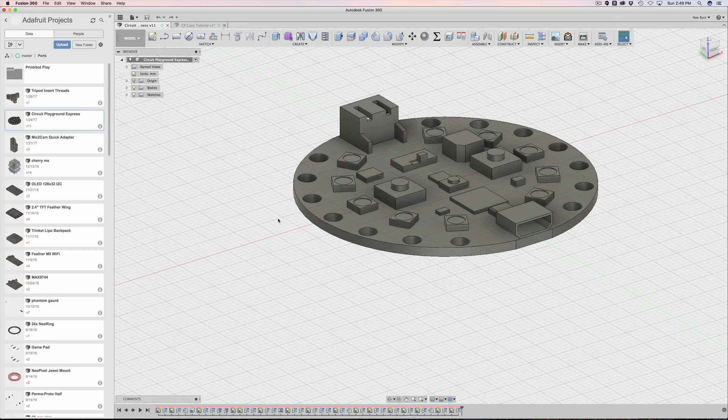In last week's tutorial I showed you guys how I put together the new Circuit Playground Express board using EagleCAD and Fusion 360. So in today's tutorial I'm going to wrap this up and make an enclosure using the component that we drew of the Circuit Playground Express.

So here it is, here's the board. This is free to download and use in your project, so you can do that. You can download it in many different types of formats. I'll have the link down below.

So the first thing we do is create a new document under File, New, and I already have one saved out. Be sure you save the project first. Then what you can do is import the board into your project by right-clicking on it and going Insert into Current Design. This will bring it in the center of the grid, which is perfect. That's where we want it, so we don't have to move it. I'll just hit OK.

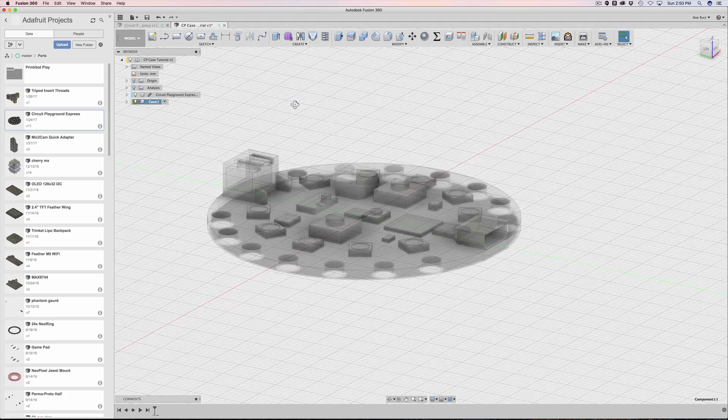And the next thing I'll do is actually make a case component. So I'll right-click on the main assembly here, create new component, and let's go ahead and name it as case, because that's what it will be. And you get a grayed out version of it because now it's activated.

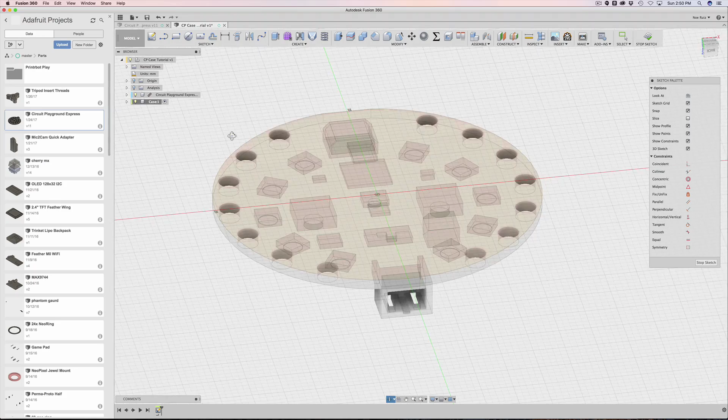So the first thing I'm going to do is actually select the bottom of the component, which is kind of the face of the component. And then what I'll do is I will create a new sketch. That way Fusion will know where to set the plane, and it'll do a projection of that bottom face of the Circuit Playground Express board.

So I'll hide it for now, and what I'll do is create a circle in the center of our grid here, and I don't know how big this needs to be yet, so I'm just going to fake a number like 58 and hit enter.

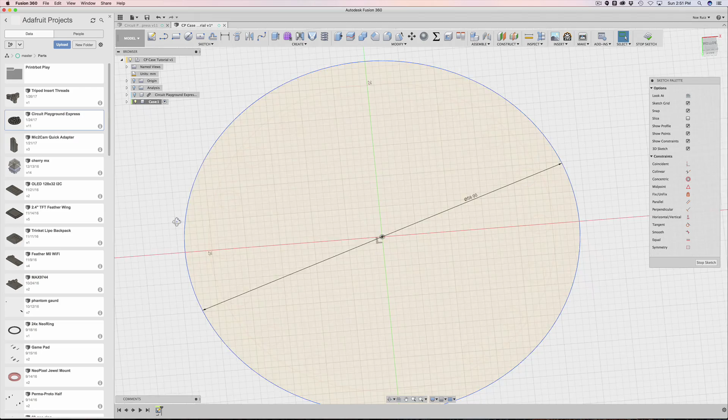The next thing I'm going to do is create a wall for the enclosure, so I'll select the outer circle and hit O for offset, and then I'll bring it inwards. I'll type in -1 because that's how thick I want the walls to be. So hit OK. That's kind of it for now.

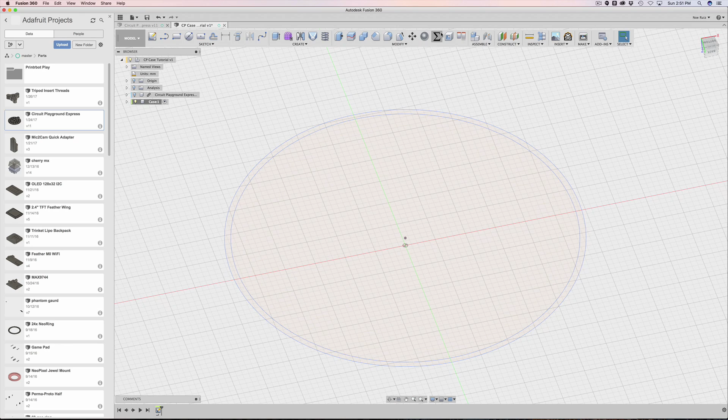The next thing I'm going to do is actually make a user parameter. So I'll bring that window up — well, I already created one, so let me create a new one. I'm going to call this case diameter, and I'll put in whatever value it was, 58, and hit OK.

So now I can extrude this out, and I'll show you why I created a user parameter in a second. I'm going to bring back the Circuit Playground board, and I'm going to grab these three profiles from the sketch that I drew. Actually, you can see there's a bunch of holes and things. So an easier way to do it is, let me hide the Circuit Playground again.

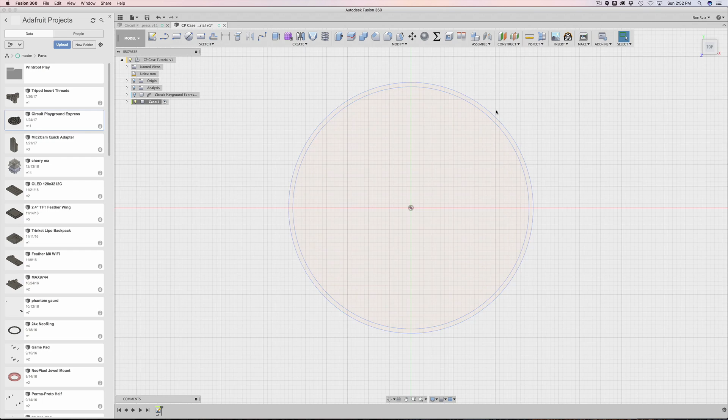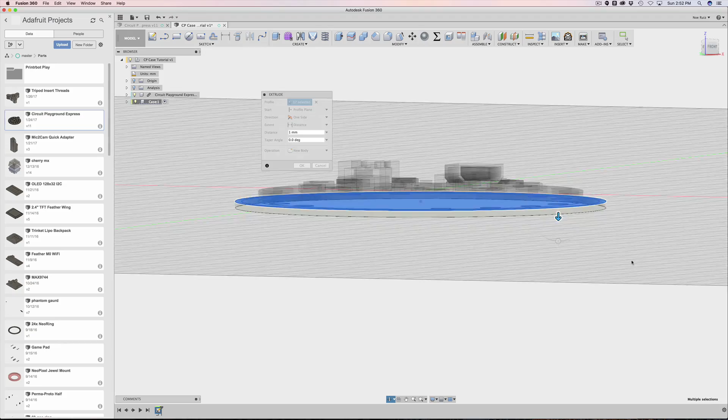What I'll do is make sure your selection over here is set to window selection. Then I'm going to click on the right and drag to create a marquee window, so I can select like a bunch of every profile that's in that sketch. Then I'll hit E on my keyboard, and I'm going to extrude it by 1 millimeter down. It already knows to go down, so that's good, because if we were extruding up, we'd be intersecting into the component. But right now we're creating it down, which is what we want.

So hit OK. Now Fusion's going to go ahead and kind of hide that sketch, but we need to bring it back, so I'm going to bring it back. I'll even name it while I'm here — it's called case, I put some capitals there.

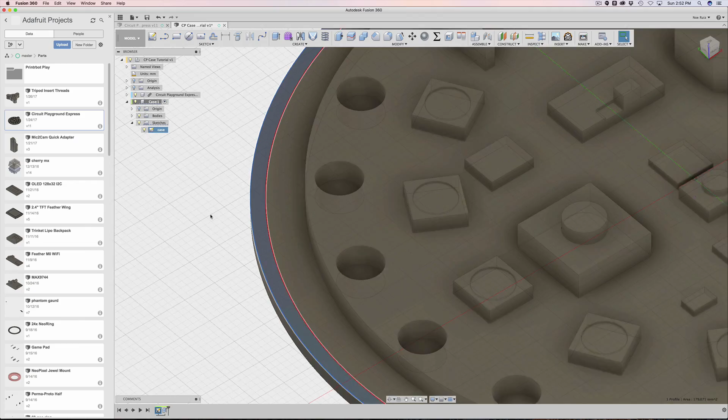Whatever. Next thing I'm going to do is grab that wall profile that we did, select that, and then hit E on my keyboard to extrude it. I'm going to extrude it upwards because we kind of want to enclose the Circuit Playground. Now, how tall you want it kind of depends on what you want to do.

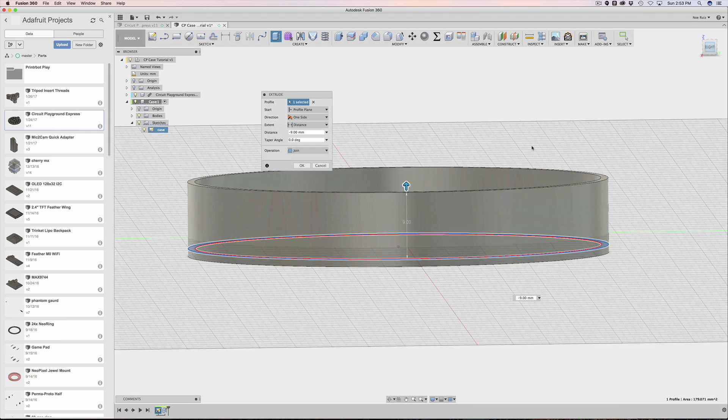I want to break out quite a few — I want to expose quite a bit of the sensors and some of the switches, so I don't want it to be too tall. And if I were to encompass the whole case, it would kind of have to be over 10 millimeters or so, just because the JST connector seems to be sort of the biggest thing of the project.

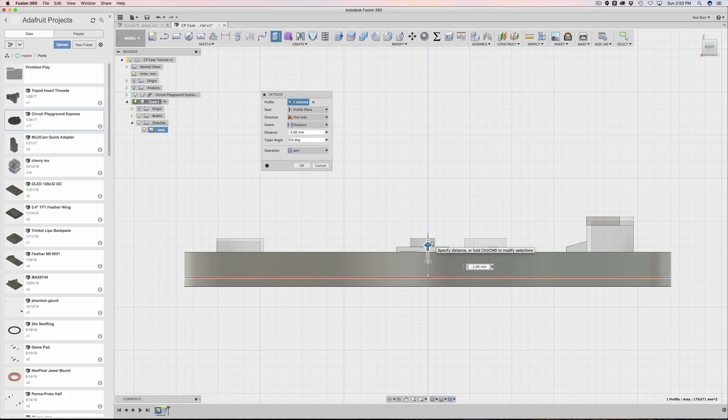So what we're going to do instead is create cutouts so that these components can kind of poke through the top of the enclosure. So I'm going to make this actually kind of small — I'm going to make this 3 millimeters tall, so hit OK.

Now what I'll do is create the lid. To create the lid, I'm going to select this top surface of the enclosure, like the lip area, and I'll go ahead and create a sketch with that selected in Fusion.

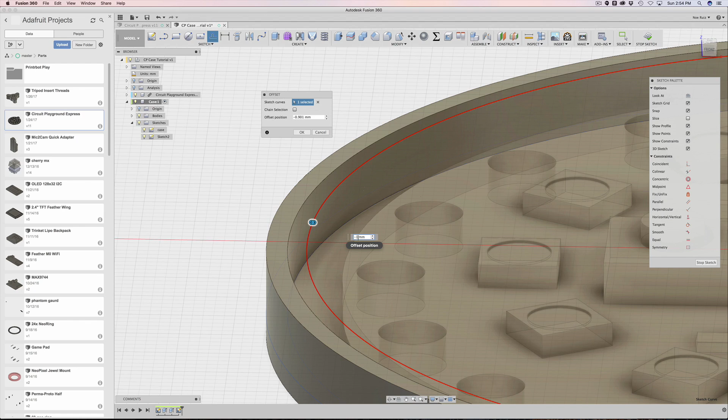Fusion's fine. The next thing I'm going to do is select the inner wall edge, and I'll hit O on my keyboard to offset that, bringing it in to -1 so that I can have a lip that goes on the inside of the case. I'll hit OK, and I'm pretty much done with that sketch. I'll name it as the cover because it's going to be the cover of the case.

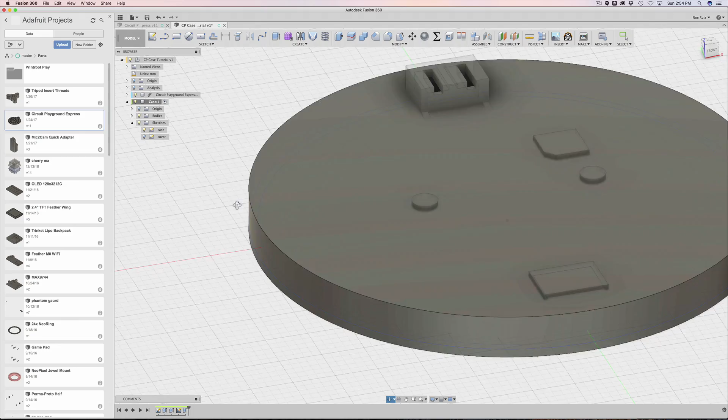Now I can select these 3 profiles from the top cover, hit E on my keyboard, and extrude it by 1 millimeter. I'll hit OK. Looks like I forgot to change the operation. What's awesome about Fusion is you can double click on that extrusion in the timeline and change the operation to new body. Hit OK, and that creates a new body.

Let me bring that open, and let's go ahead and name these now. Call this cover and this one case.

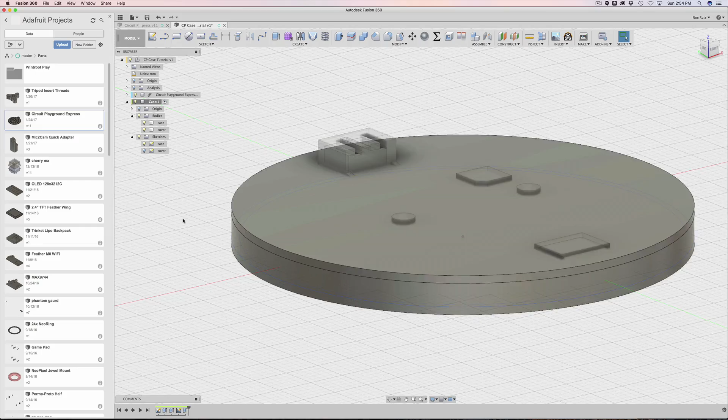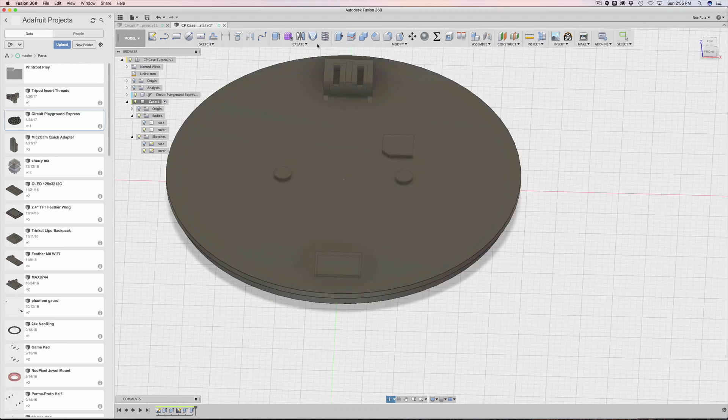Now I'm going to rotate underneath it and hide the case, then hide the case sketch, bring up the cover sketch, and see that little inner wall we created, the little inner circle. We're going to extrude that upwards by 2 millimeters, then hit OK. So now what we have is a lip coming from the cover that will snap into the inside walls of the case.

What we can do now to get a better look inside is create a section analysis under inspect. There's a button called section analysis, or I have it already up here. Click on that, and it'll create a section analysis depending on where you want to set it. I would open the origins and select one of these planes, which is fine. You can rotate it, but I'll have it right there. I'll hit OK.

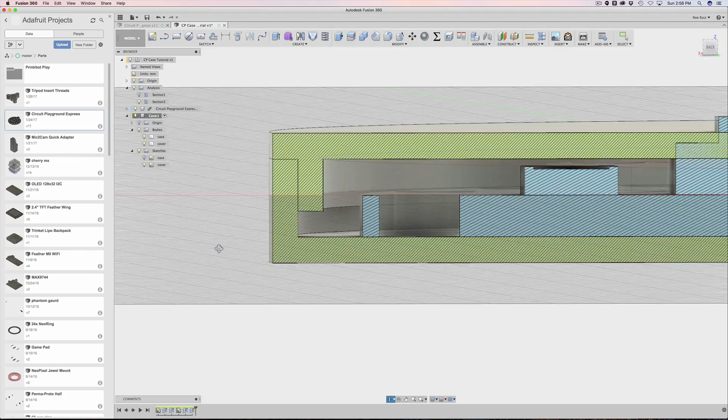When you look inside the section analysis, you can see how it's fitting together. You can see how this wall has a little bit of clearance, so it doesn't touch the bottom, which is fine. We just want to have enough material to be a little bit touching.

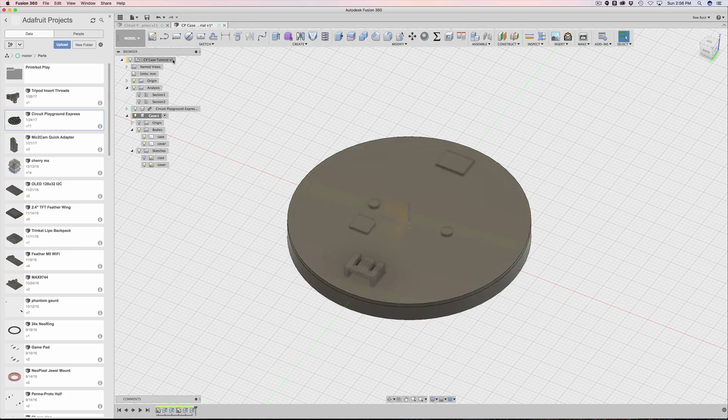The next thing we want to do is start creating some cutouts for the top cover. Let me turn the section analysis off - we're intersecting with a bunch of things. You can see the JST is too tall and some of these buttons are a little big, so this wouldn't work, right? We need to make some cutouts.

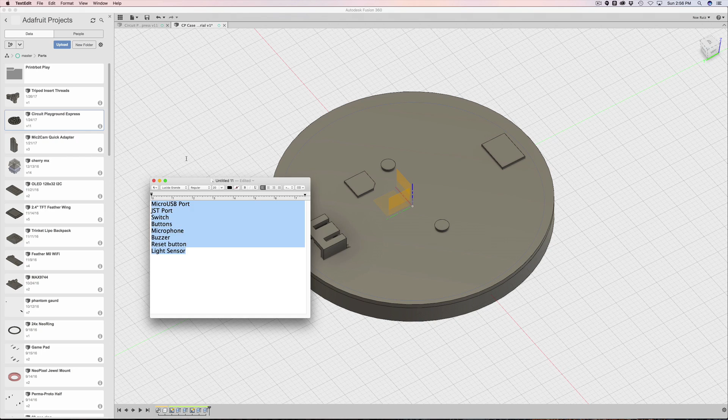I wrote down some notes of what things we want to expose, and I already have them typed out. We want to be able to access the USB port, the JST, the switch which can be used for on or off or other types of things, the 2 buttons on the left and right, the microphone, the buzzer, the reset button, and even the light sensor. I didn't put the NeoPixels because we can print this in a white or translucent case so the lights can shine through.

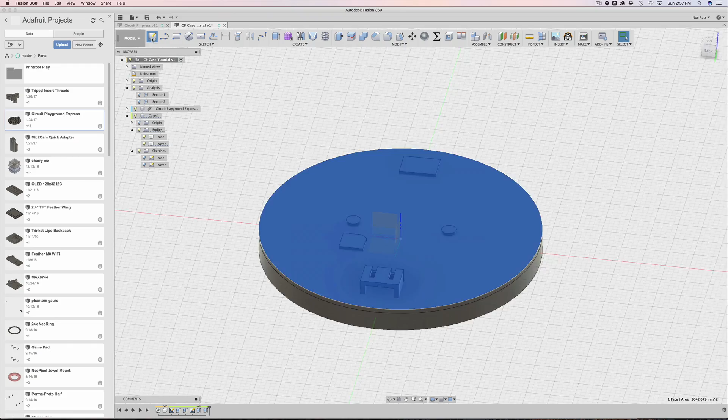I'll go ahead and get started on making those cutouts. What I'll do is select the top of the cover, then hit create sketch. It's really important that we sketch on top of existing geometries and faces so that when we update them later, things will dynamically change. I'll show you that in just a second, and then we'll adjust the diameter dynamically. So I'm going to get rid of the cover, just hide it for now.

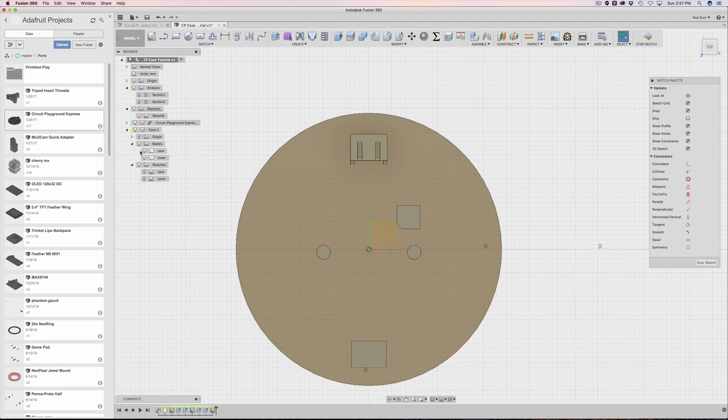Now that I'm in this sketch, I'll project in some geometry. I'll hit P on my keyboard, or you can go up to sketches and hit project, then start clicking on things. I want to expose these 2 buttons, so I'll click on those top surfaces.

I want to expose the reset button. For the switch, you see how this top surface creates an irregular rectangle? I could select the bottom pieces instead and select one line at a time to create that generic rectangle representation of the component. But for this shape here, this is the buzzer, so I can just click on the top face.

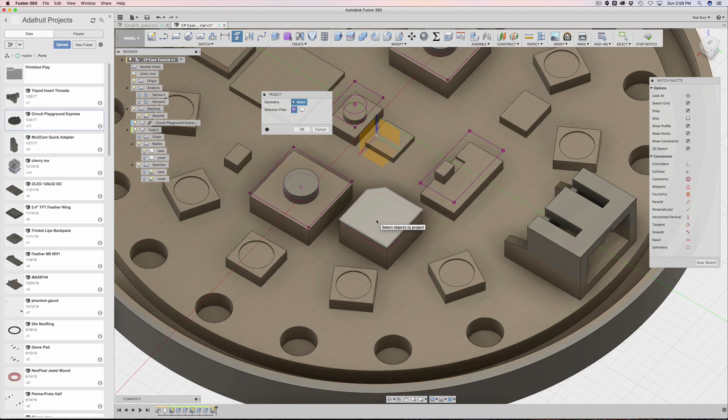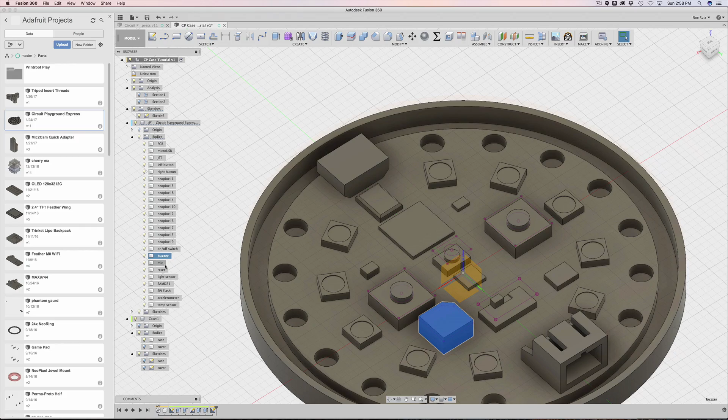I'm not sure where the microphone is yet, so I'll hit stop sketch since those are projected in there still. I'll open the component here, the Circuit Playground Express, and look for what I want. The buzzer, I already got that. The microphone is over here, so let's project that one in.

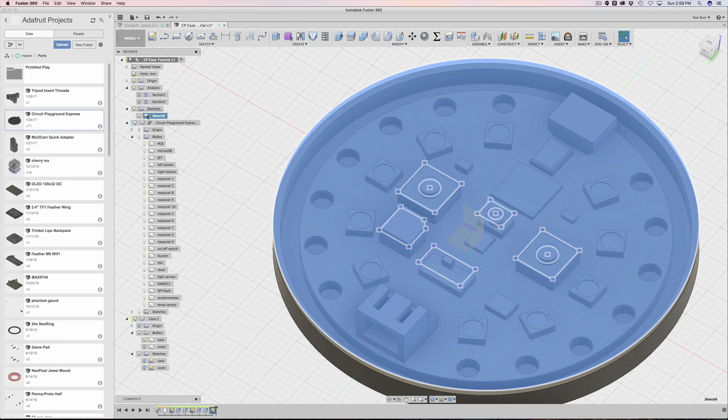I'll go back into that sketch. Where did that sketch go? Looks like the sketch is on the outside, so that's fine. It just looks like we didn't have the component active. That's okay, we're just gonna click on it and open it. We could put it back in the component, but we don't need to right now.

I already forgot where the thing was. Where did it go? Here's the light sensor, so let's project that in. Hit the project button, bring that in, and then hit OK. Let's see, what else was it?

The light sensor's in. We want the temperature sensor, but I don't want to expose that one. And the mic, let's expose the mic. So again, P for project that in, hit OK.

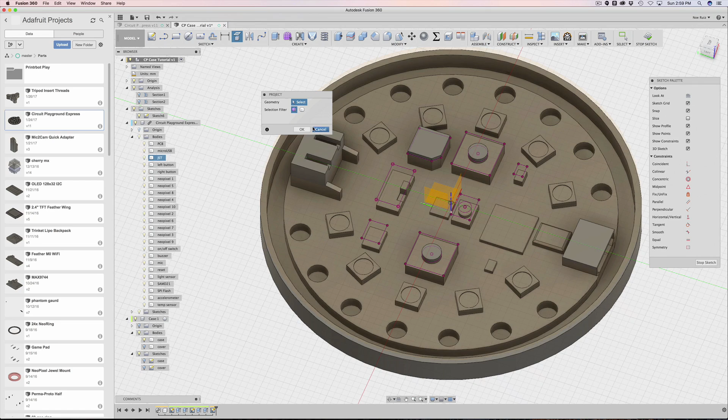The next thing we need to do is project in the USB port. Those are pretty important, so P on that one. There's another way to do it as well: you select the surface first and then hit P on your keyboard, and that'll project it in while you're in the edit sketch mode.

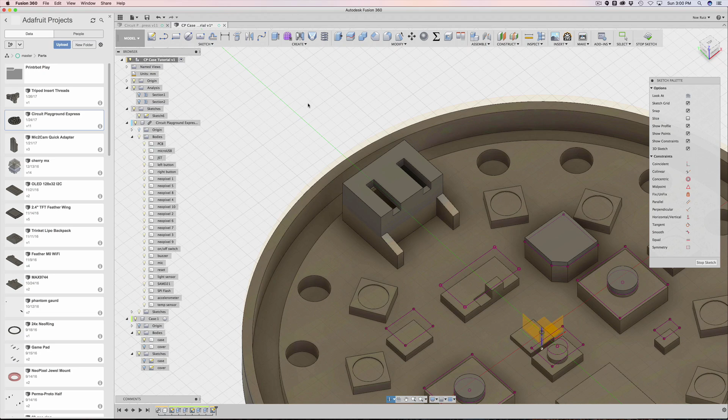For this guy here, I'm going to project in some of the lines because there's a bunch of geometry that I want there. I just want lines, so I'll select these in. Hit OK. So now if I look at it directly on top, you can see how the projected sketches are the purple lines, and they're exact representations of the components. If the components ever change for whatever reason, this sketch will update with them because they are projected and they're being referenced by those components.

The next thing we need to do is create some offsets for these cuts, because if we were to cut these out now as they are, they would need a little bit of tolerance in order to fit through those components. So I'm going to create some generic rectangles to create offsets. Now, you can't really create an offset from a projected sketch.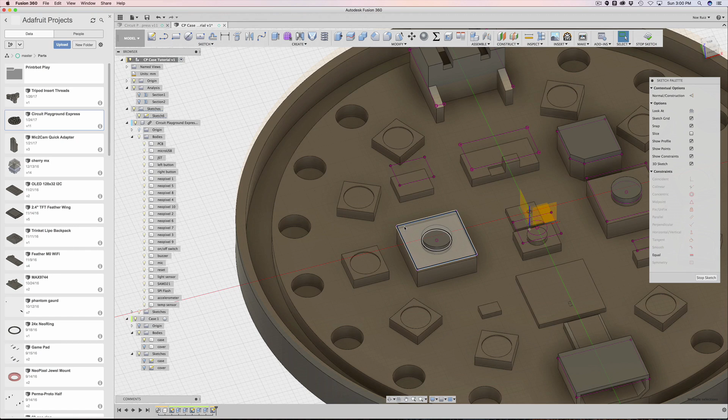So if I wanted to offset that, if I try it... it works! Wow, I thought it didn't work. Well, guess what, we just learned something new. Maybe it works. So I want to project it outwards by 0.4 millimeters and hit OK. Wow, it did work, I didn't think it worked before. That's kind of funny, so that saved me a lot of headache, a lot of work, which is great.

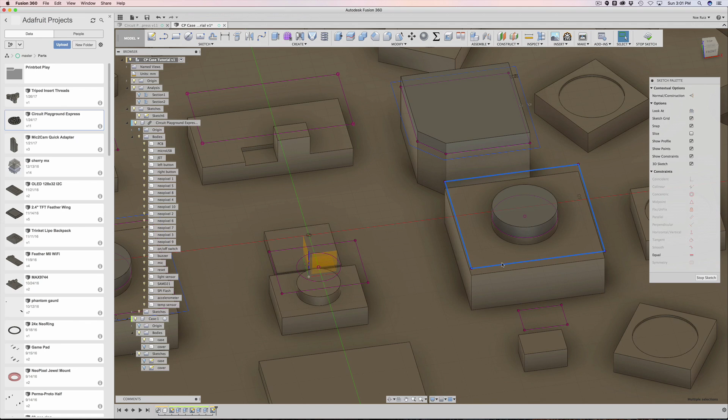What I did though is double click on one of the lines to create... let me try it on this one, double click and you create the whole loop, which is awesome. So I'll offset that one, hit O, put 0.4, maybe copy that into my clipboard because I plan to do that for a lot of things. Double click, O, paste, enter. Double click, did that work?

No. Double click. Oh, I see, it doesn't work for this one, it only works for loops and not like... this isn't a full loop for whatever reason. Because when I projected, I didn't project a surface, I projected edges. So in that case, now I can show you how I was originally doing it.

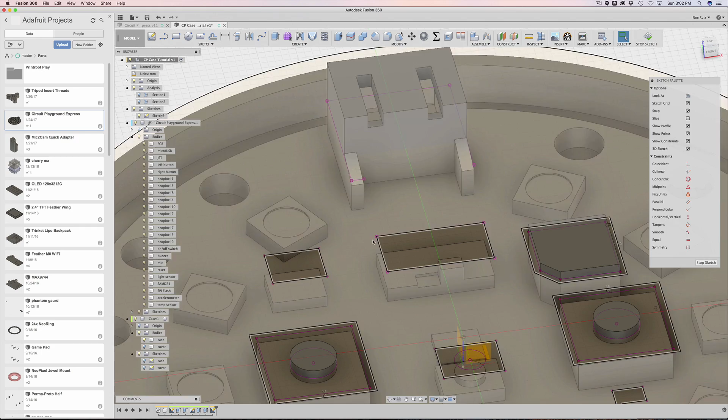It was like using the rectangle tool, which is up here. I used the 2-point rectangle, just kind of create a rectangle over it. And then I used the sketch dimension tool to give it some constraints, saying I want this edge to be a certain distance from that edge, and then I'll put 0.4. Problem with that is I have to do it for every edge, every edge. So there's 4 edges, but as a workflow, you already know what to do.

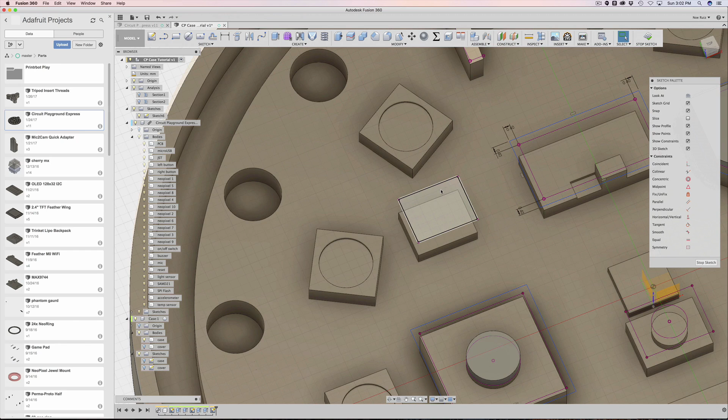So I'll hit escape to get out of that tool, double click, O, paste, enter. Great, so it works for most things, but not all of them. And you don't have to use squares.

For this light sensor, I'm actually going to do a circle, so I hit C on my keyboard for a circle. What I'll do is to get to the center of this... oh, Fusion already knows, awesome, so I just rolled over and it kind of gave me a smart guideline. So I'm going to make this like 3 millimeters, like that, and make a little circle cutout.

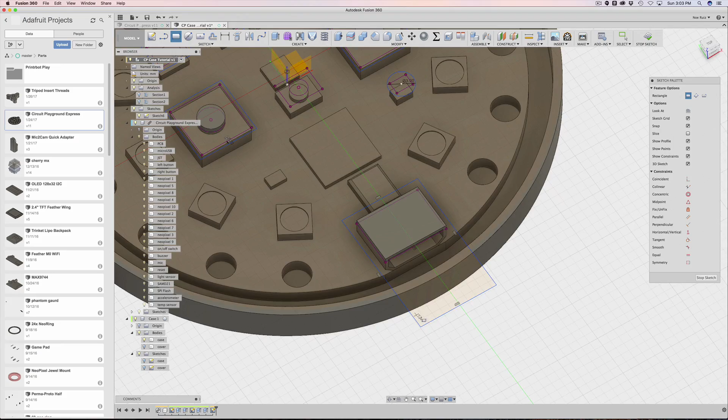So now the last things we're going to do is the USB port and the JST port. For that, I'm going to create a custom kind of shape. It's going to cut outside over here, going to go beyond the edge of the enclosure. And then I'll constrain it to those edges here, like this.

0.4, this one, 0.4. All right, so that's it for USB.

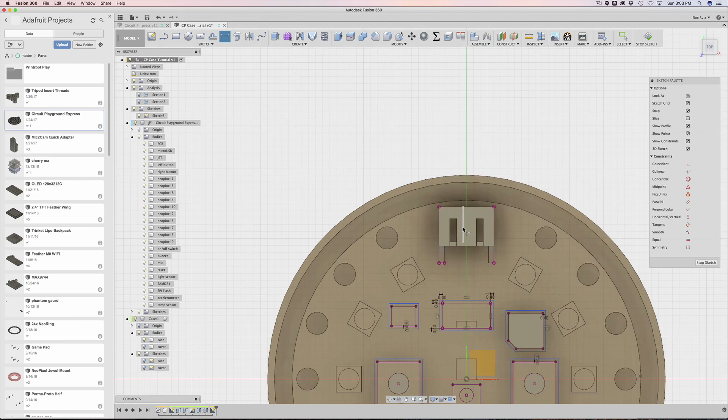Now let's do another rectangle for the JST. Some more constraints. That was pretty close. And then the last one here. There we go. Okay, so that's all the cutouts we want to do.

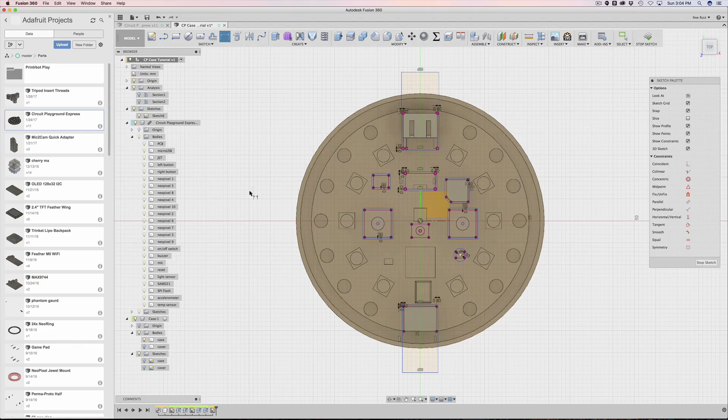The next thing I'm going to do is actually make it easier to select all these profiles, because now you'll see if you wanted to extrude this out, you have to select 2 of these things. So one easy thing to do is to select one of these, one of the edges from the projected sketch and just hit X on your keyboard.

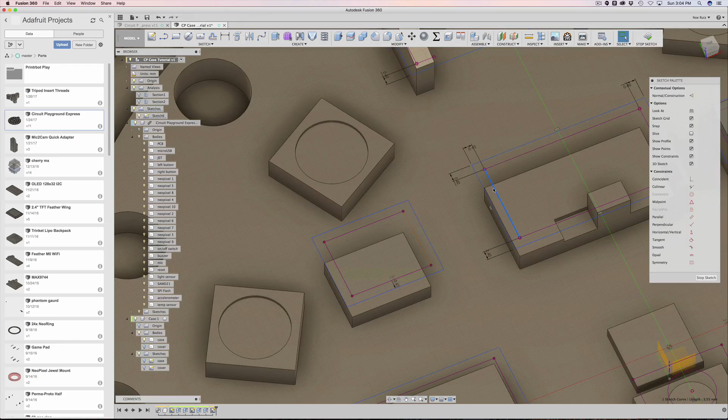And what that'll do is kind of break the loop so that I can select just one profile. All it's doing, you can always change it back by clicking X again, selecting it, pressing X on your keyboard. But in this case, we probably won't be bringing it back, so this just makes it easier to create. Like that one didn't need it, but this one certainly needs it.

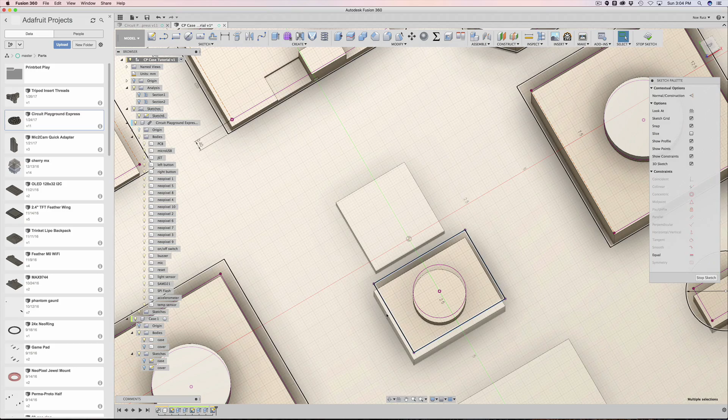So I'll hit X there, X there. It doesn't matter which one you select. So as long as, oh look, we forgot, how could we forget you? We forgot this guy, so I can do an offset here. Double click, O, paste, enter, click on one of these edges, hit X, and I'll even X out the center guy there. So now I just have a straight single profile, and I'll have to do this one too.

Cool. And this one, you get an X, you get an X. There we go. I think that's all of them. Yep. So I'll hit stop sketch.

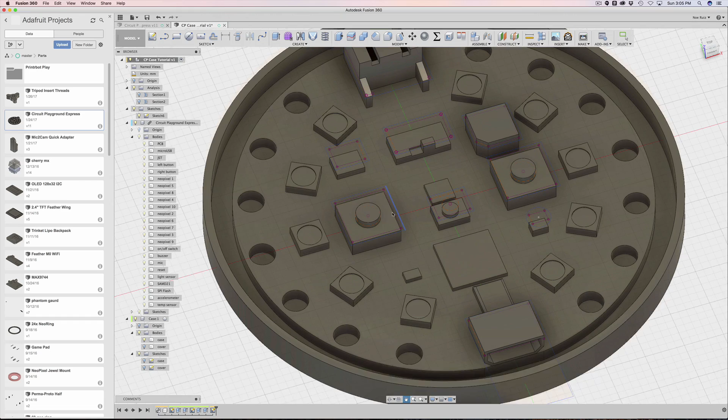Now I will select the things that I want to, looks like I didn't cut one here. Whoops, let's go back in there. And hit X. I really don't want to select multiple, but I'm doing multiples anyway. It's funny. So select this one, this one. Maybe I'm selecting too fast. Nope, just fine. Like that. And then we'll grab these guys.

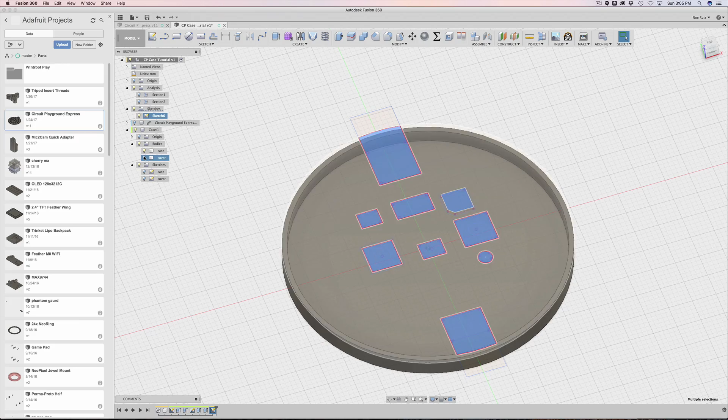And this guy. Cool. So what I'll do is hide the circuit playground and then bring the cover up. And what I'll do is I'll hit E on my keyboard with those selected, and I will cut. Actually, what I'll do is I'm going to make a dynamic cut

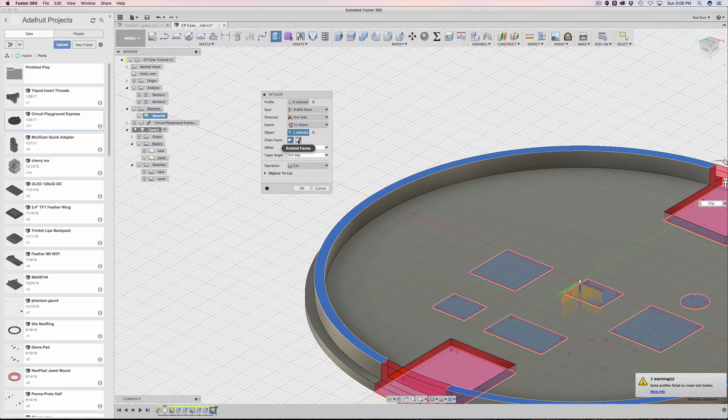on the cover and say I want to extend this to an object from right there. And what I'll have to do is change the chain face. The chain faces need to be on the extended faces so that the extrusion extends out the cut. And we do want the operation to be cut because we're making holes. So I'll hit OK. And now we have some nice cutouts.

Looks all cool and crazy looking. All right, so now when I bring back this circuit playground, oh, you know what? I forgot the extrude one.

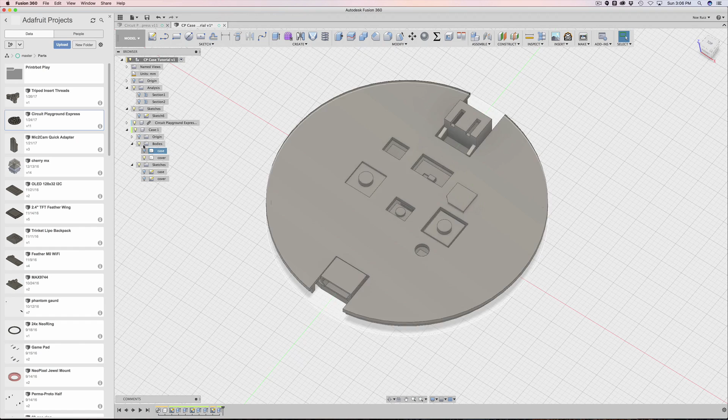That's fine. Inside of, in the bottom here, I can double click on the feature and just add that by holding down Command on my keyboard. So I hit OK, and it's back. All right, we got it.

So let's bring back the circuit playground again, kind of make sure that we got all of our points, and I believe we did. Cool.

So the next thing I'm going to do is bring back the case, and I need to kind of create some cutouts here because it looks, especially for the USB port, you can see that the lip is covering it right now. The wall of the case.

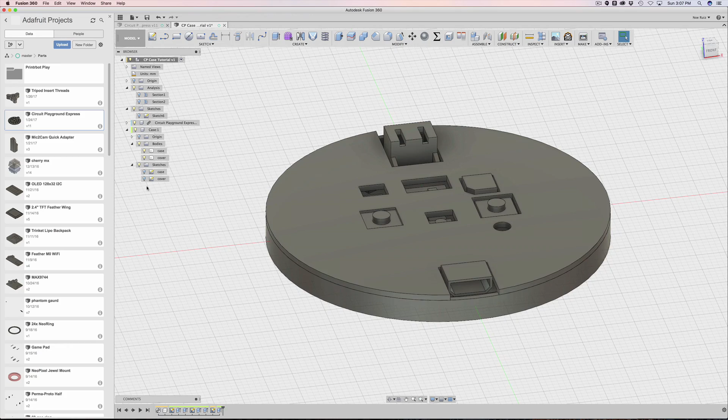So what we need to do is bring back our sketch here that was making cuts, and actually I'm going to do something a little bit special with the USB port. I'll show you what I'm going to do. So I'm going to go back in there, and I'm going to create a line using the line tool up here, sketch, line, or L on your keyboard.

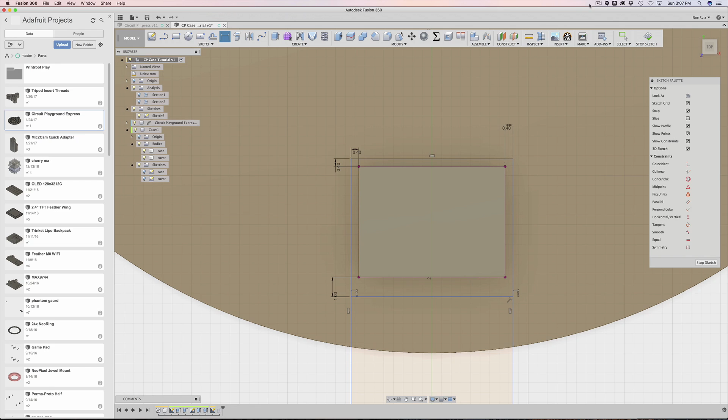And I'm going to cut it like right about here, creating a line, and then I'm going to use the sketch dimension tool to give it a constraint. I want to be 1 millimeter away from it. Hit OK. So now I can do is select that little thing here that I made.

It kind of intersected and created this little rectangle shape. So I hit E on my keyboard, and I'll start extruding this down until I reach, I think 2.5 millimeters is fine. So when I hit enter, you can see now I have room.

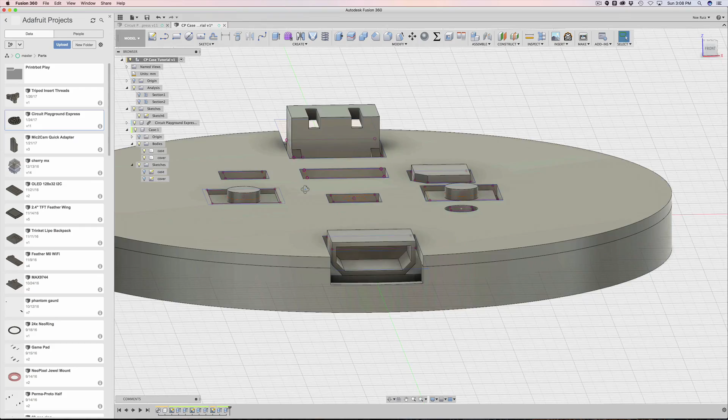Actually, I want to cut all the way down. Let's cut all the way down. So I'll change the extent from distance to object, and then click on the bottom, hit OK. That way, when we put a USB cable in here, it has room to reach it.

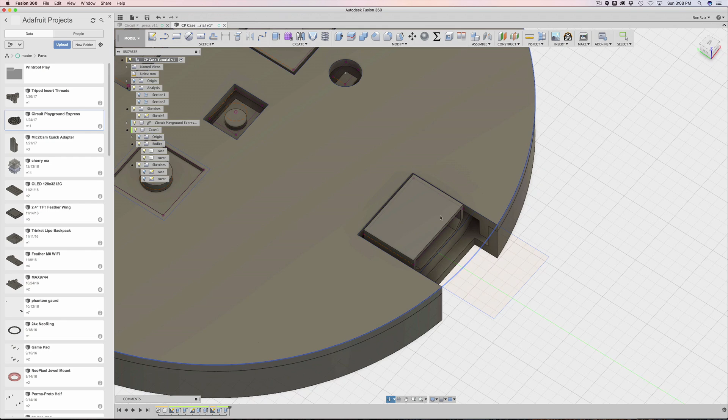And the next thing I'll do is, actually, this is probably a good opportunity to update the diameter of the case. So check this out.

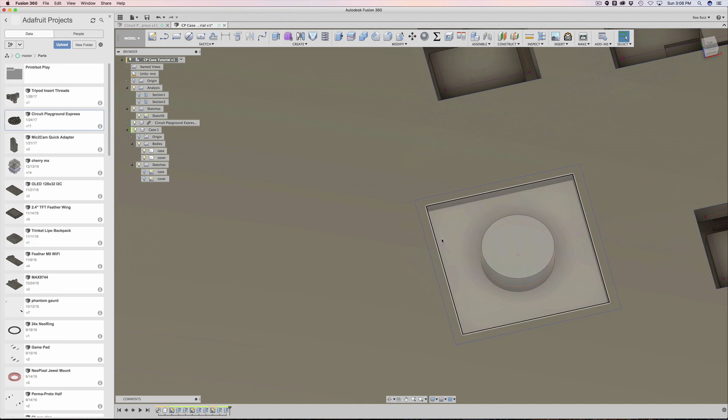Looks like the hole here doesn't look correct. So what I think happened is inside the sketch we forgot to put a construction line for that. So that was a problem. Hit OK, and then go back into the cut, the first cut, and select that back in there.

I'm gonna hide the case for a second, and you can see now that it's really the inner lip that we need to worry about if we're gonna decrease the overall diameter of the case. We need to keep our eye on this and make sure that this wall doesn't touch the edge of the PCB, so we want a little bit of clearance there.

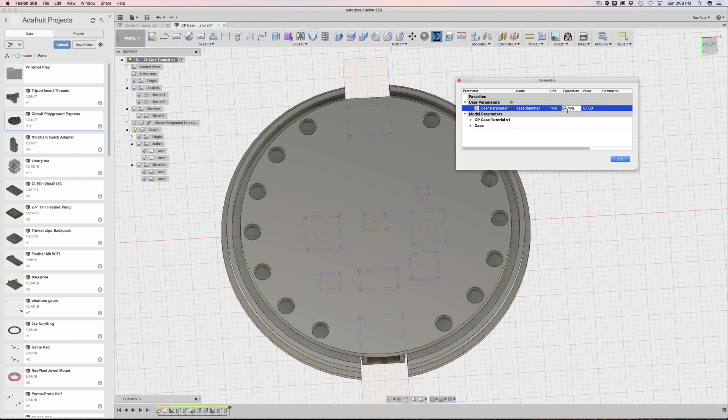So what I'm going to do is bring back our change parameters. I'm going to drop this down to 57, 56. And what you'll see is that it's supposed to change the diameter, but it's not changing. So I'm going to go back into this first case, and you see where it says, oh, obviously I didn't apply it. See how it says 58?

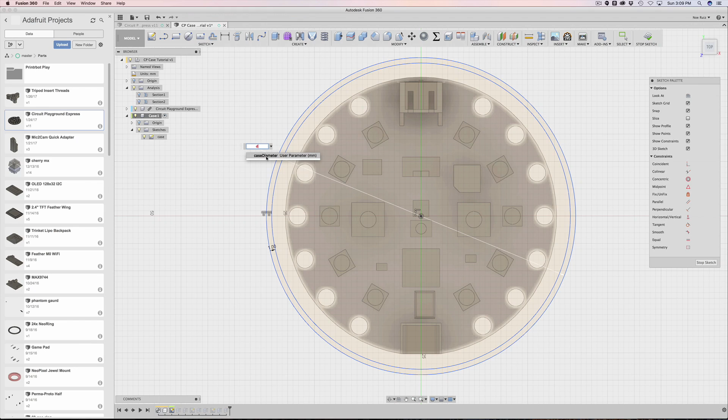I'm going to double click on that and change this to case diameter. I just hit D on my keyboard and it kind of knows I'm looking for diameter, so I'll hit enter. You'll see that it changed to FX56, basically saying that's a function and the dynamic value is 56. So when I hit stop sketch, you probably can't tell that the thing has changed, but it certainly has.

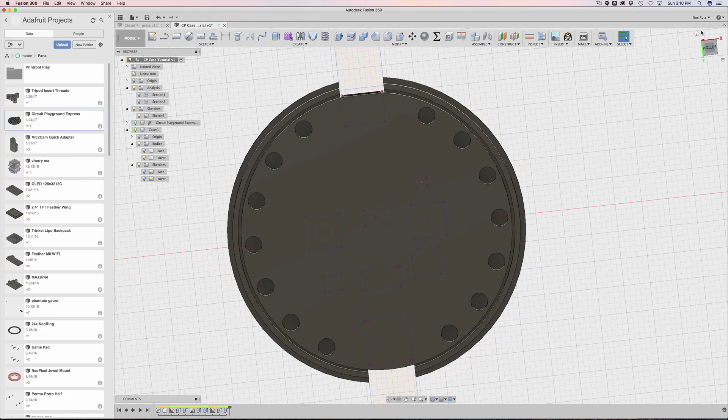So I'm going to hide the sketch again and bring back the bottom here so I can see the inner lip, and you can see that it's now closer to it. So what it was before was 58. Let me change that back to 58 just to give you a look at it, and you can see how it updated everything. It updated both pieces, and the cutouts stayed the same.

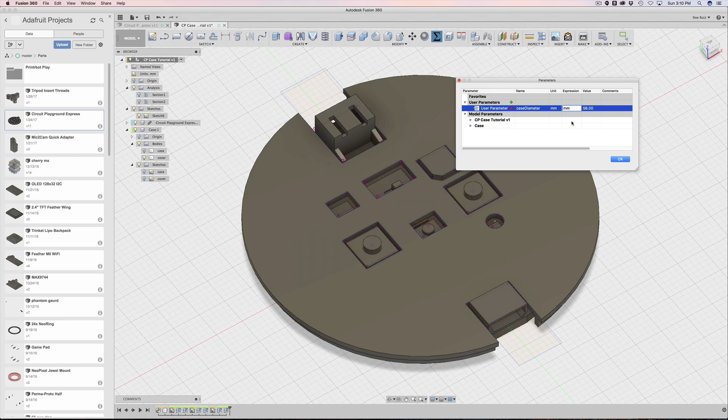So let me do something drastic like 70. Makes it really, really big. And you can see some of the cutouts didn't go with it because they're a certain size. But that's okay, I'm going to bring this back to 56, or maybe it's 57. I think 56 is actually fine. We want to have a teeny bit of clearance here between the two edges, which is fine.

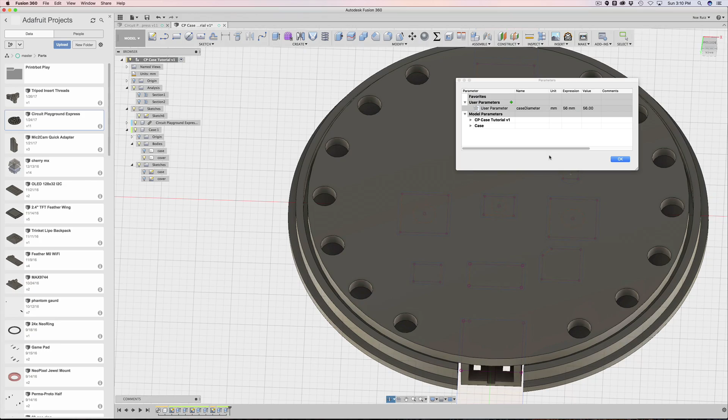I'll hit OK. That's just a quick little thing I wanted to show you guys, like I wasn't too sure how big the diameter should be. So by being able to use a parameter, I can dynamically set it without having to change too much, as long as you apply it. I didn't apply it first, so that's why I had to go in there.

So the last thing I'm going to do is make it easier to align these two pieces when we snap them together. To do that, I'm going to make some nubs, extrude off of the bottom of the enclosure. Let me hide this sketch here. This surface, see how that's the bottom of the case? I want these little nubs to poke through some of these holes, some of these pinouts.

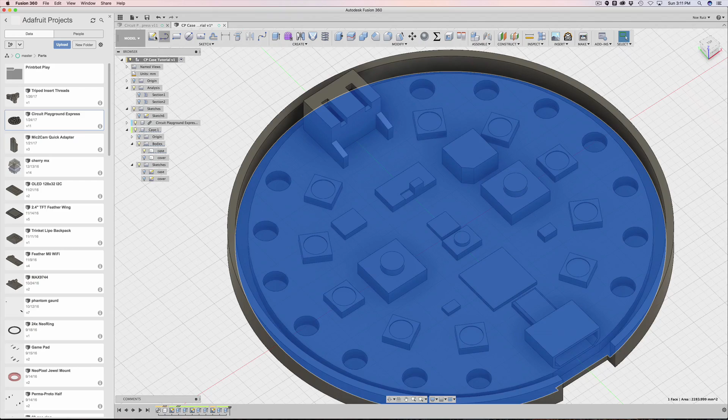So what I'll do is with it selected, I'm going to create a new sketch, and project in a couple of these circles. So P on my keyboard, I want this one, and then those two on the opposite side of the board. So these guys over here next to the USB port, these two, and that's what I want to do, just those two.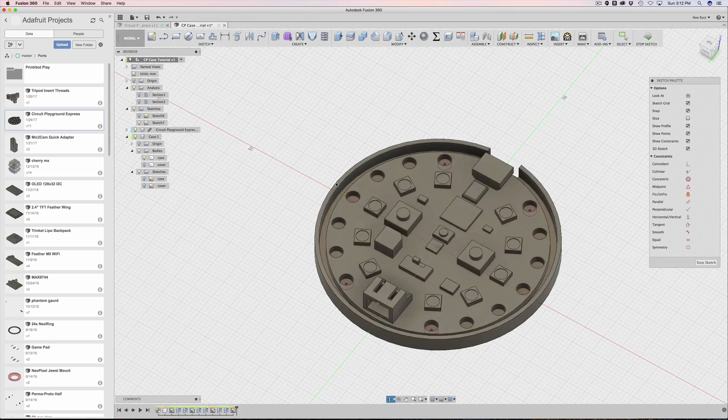Now what I can do is hide the circuit playground for a second. I can select these guys by holding down Shift, the profiles. I'm just selecting the profiles, and then I'll hit E on my keyboard to extrude. I'm going to extrude these out to about 2.8 millimeters, and I want the operation to be join, so I'll hit OK.

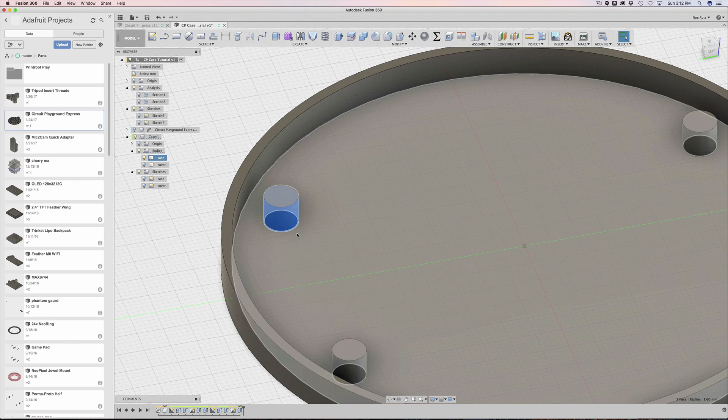Now, the next thing I'm going to do is click on one of the nubs and hit Q on my keyboard to make it offset. Make sure it's set to new offset, and then I'll select the rest of the four here. And then I'll put an offset of -0.2, essentially making it kind of smaller than the hole, because when you're 3D printing these, they actually tend to expand a little bit.

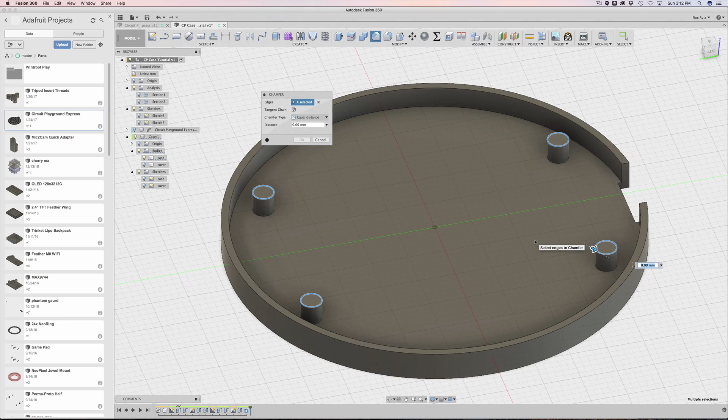Next I'm going to select the four top edges on the nubs and hit the S key to bring up the model toolbox, type in 'cham' for chamfer, hit enter, and put a value of 0.5, half a millimeter. Now I have these nice little nubs that can go inside the hole pins, giving us mounting points that will ensure our board is aligned properly.

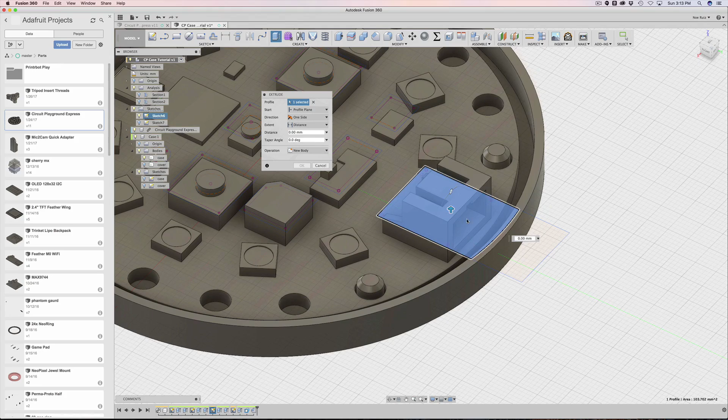Looking at this JST connector, I realize I need to make a cutout for it. That's easy enough. We come into sketch 8, click on that, extrude this down, and it turns into a cut automatically, which is nice. 2.5 is perfect, so hit OK. Now you can see I have a bit of a cut on the wall so the JST connector can go inside the JST port.

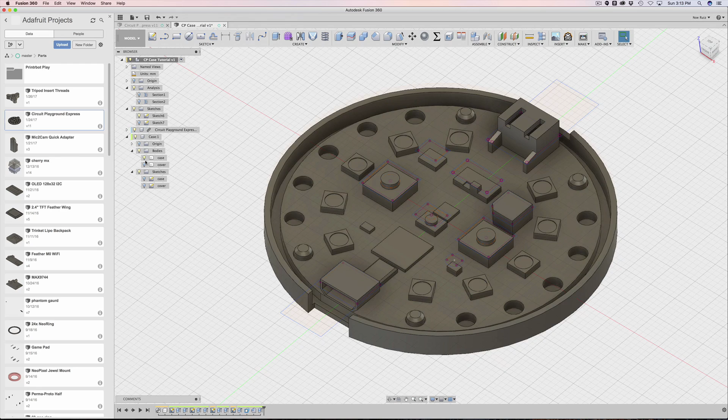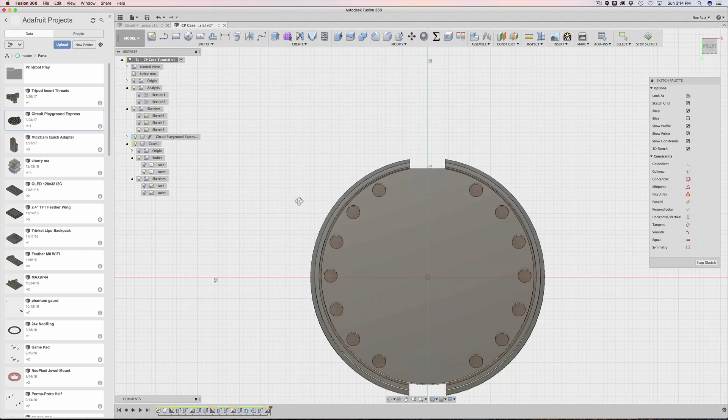Now I'm going to do something similar for the top, but on different pins. I'll hide the case, bring up the cover, select the inside surface, and create a sketch on it. Instead of selecting those, I'll hit P to project just two pins, one from the far left and one from the far right. I'll hide the component, hit OK, and extrude these out by 2.8 of a millimeter.

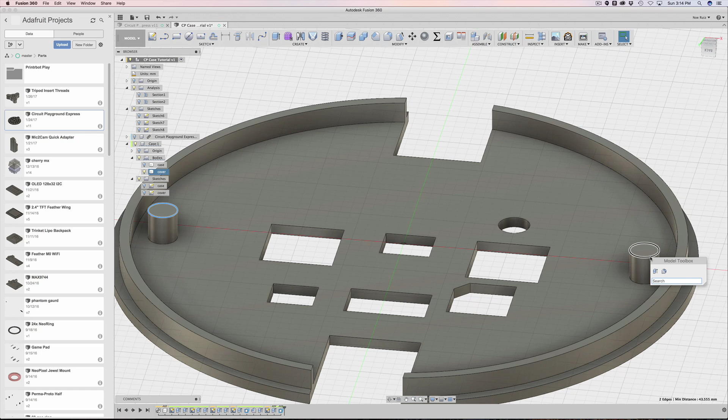Then I'll create an offset on these nubs of -0.2, and create some more chamfers using the model toolbox, 'cham' 0.5. So those will go inside nicely as well.

Now if I bring back both of the cases, you can see what we've got going on here. There's a little bit of fine tuning we can still do. Let me check what the edge distance is here.

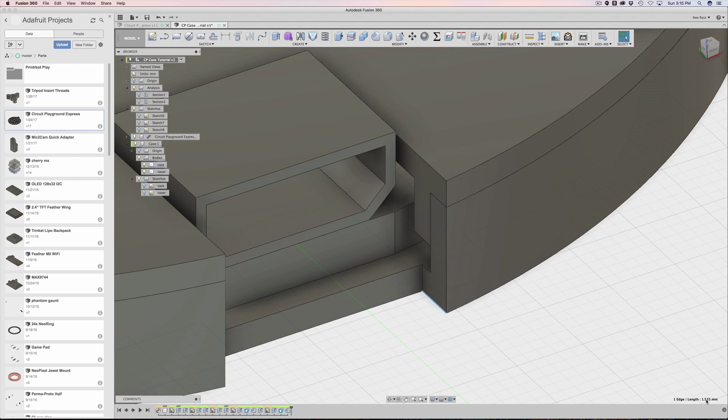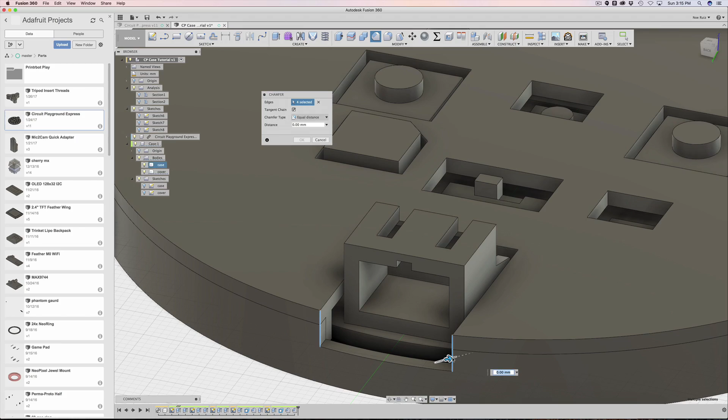The length is 1.533. So I'll select these sharp corners here -- I hit the wrong key command, so let me select them again. Hit S, 'cham', enter, 1.533. That just creates a nice chamfer to soften up these corners, opening it up a bit. I'll do that here too. This one is just one, so select these, and chamfer just one. All right, that looks good.

Again, we can use this section analysis to poke through and make sure we have proper clearances, and we do. So I think that's good.

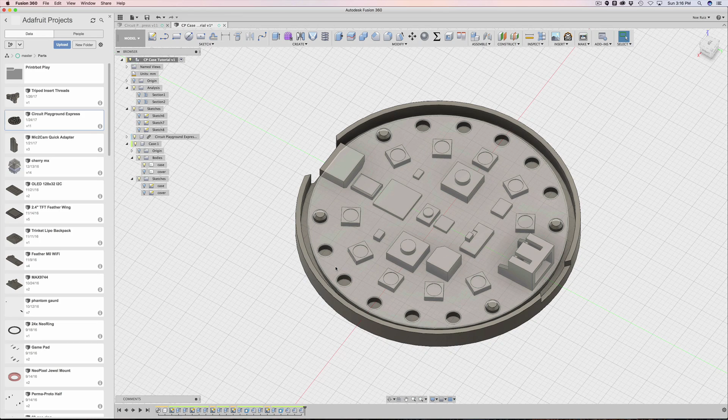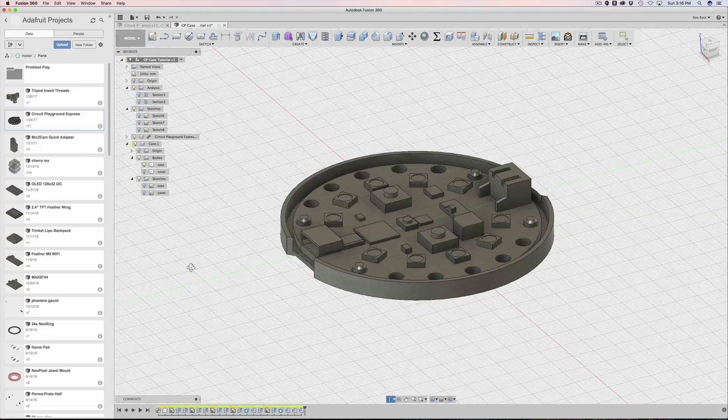We can 3D print this out now. What we could do is expose some of the pinouts, or all of the pins, for the Circuit Playground Express board, but that could create some issues. One solution is to dual extrude it and make custom pads printed in conductive PLA filament, so your enclosure can use copper tape or bare conductive paint, and you can pop your Circuit Playground in and out of the case non-destructively, reusing it in certain conductive projects. That'd be kind of neat, but there's lots of different things you could do with it. This is just a really quick way to make a super simple enclosure that still gives you access to some of the buttons and sensors. So it's pretty cool. Let me know what you guys think.